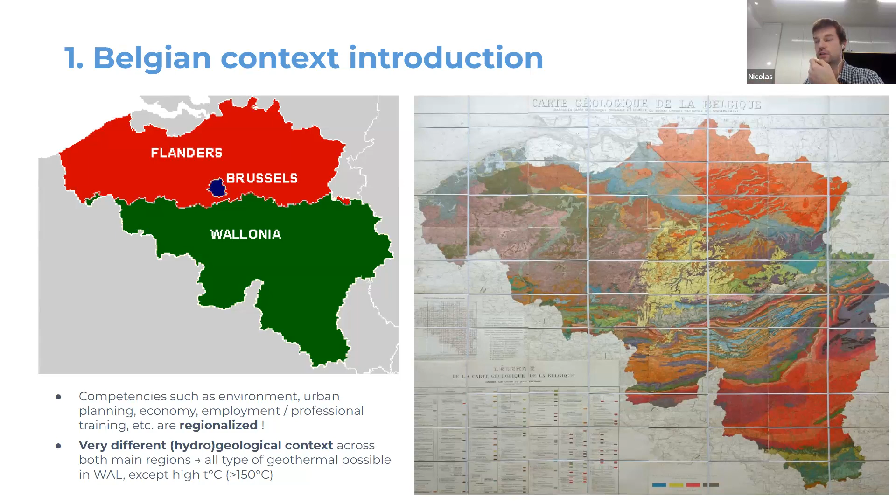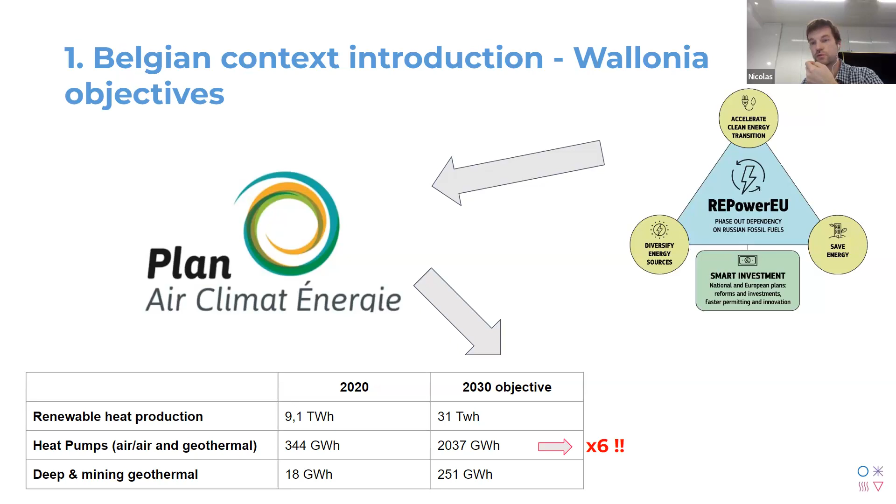If we continue on the Belgian context and especially on the Wallonia objectives, the RePowerEU plan from Europe has been translated into a plan in Wallonia, which is the Plan Air Climat Énergie, with very ambitious objectives for 2030. For example, times 6 in terms of development of heat pumps in the region.

And then there are two other locations in Flanders. Another one which is public, the Mol Balmatt well, which is productive at 3.6 kilometers, and another one that has been opened very recently by Janssen, part of the Johnson & Johnson group pharmaceutical company, which recently opened a 2.4 kilometer deep well in order to heat their big campus in Beerse.

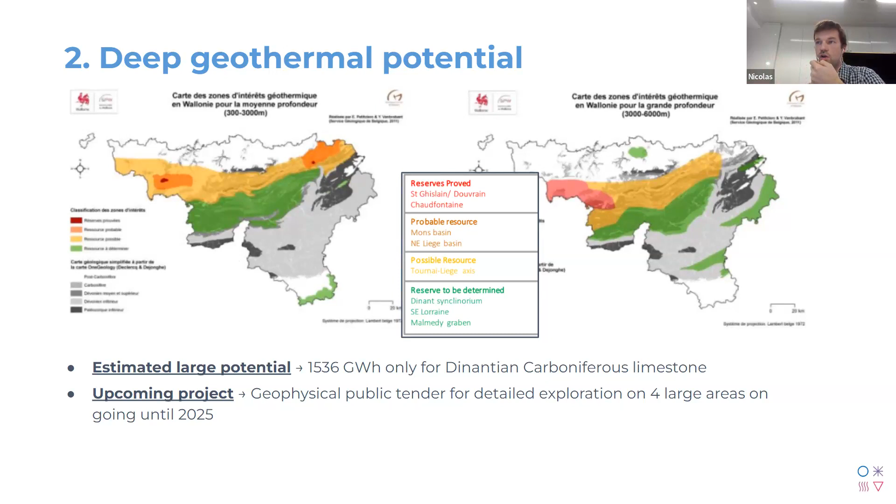If we go to the second part, which is the shallow geothermal status in the region, this map summarizes the active and the inactive shallow geothermal systems in the region. You can see that in terms of closed-loop systems, we have about 2,000 systems installed, mainly private residential installations, and that we are currently going around 150 to 200 installations per year. Again, mainly private residential installations.

In terms of open loop systems, we have only one existing project with aquifer re-injection. And there are at the moment approximately 20 projects that are under study in the region. If we look at the open loop systems with surface reinjection, we have about 40 existing projects at the moment. And then we also have 2 projects under study for mining geothermal.

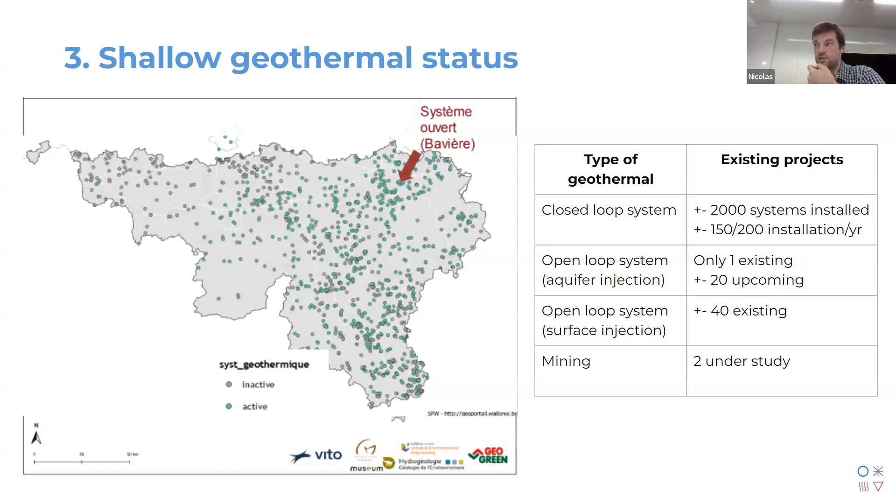If we look at the available maps for potential for shallow geothermal, we can see basically that the entire region has a pretty good potential in terms of shallow geothermal, both in terms of closed loop and open loop. I have also provided some maps that Resolia and Bruxelles Environnement, so the Environment Regional Association for Brussels region, have worked on.

You can see on the left-hand side a map of the potential for closed loop geothermal across the region. And also, I must say that they have a very good system that can be used by everyone. It's a freeware, accessible on the website. On the right-hand side of the slide, you can basically type a location on a GIS map on their website, and the website provides you with the potential in terms of shallow geothermal for closed loop or open loop systems, with a very simplified but very accurate view through geological logs and layers of what you can find in the subsoil.

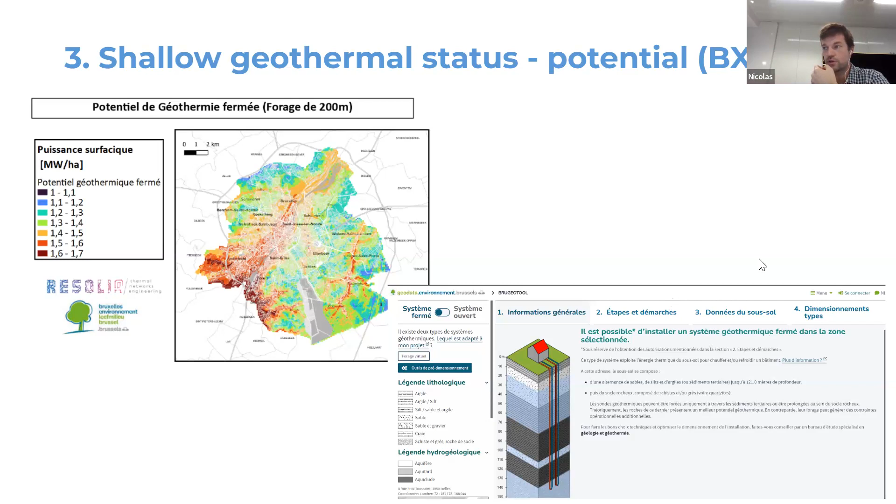What about the upcoming projects for shallow geothermal? Well, this map summarizes that for Wallonia. Recently, last year in 2022, about 34 projects have been awarded by the Walloon region to really support the development of shallow geothermal projects in the region. There are 24 private projects and 10 public projects that have been selected.

There is also support from FEDER, so from Europe. There is also the Interreg project, which helps to better understand shallow geothermal potential. There are some incentives in terms of feasibility studies. And I must say that since a couple of months, or maybe 1 year, we can see a very nice boom in the private sector, which starts to invest massively in shallow geothermal for real estate, industrial, or commercial development.

And we can also see a boom in terms of closed loop system installation for private residential. Still quite expensive, but we can see a boom in terms of installation.

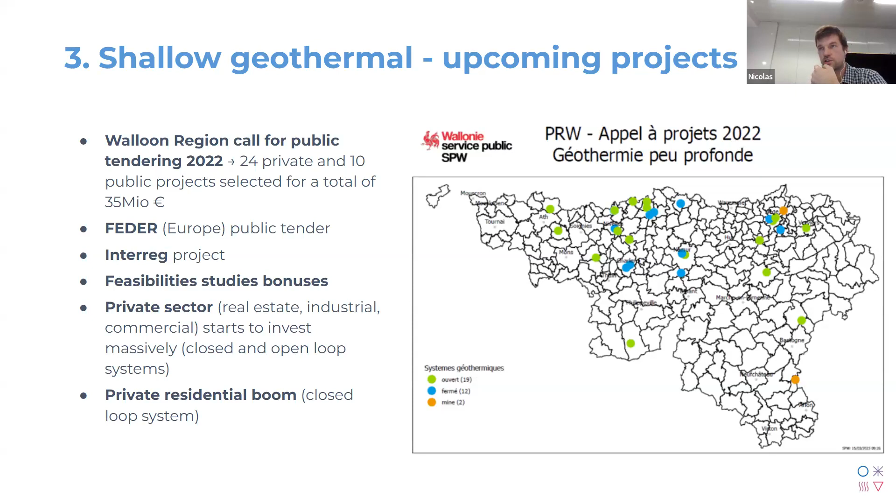The third part of the presentation is about district heating status. This is a map we quite like at Resolia because it's summarized based on the Euroheat and Power 2017 data. So it's slightly old, but it gives a good feeling of what's happening in Europe in terms of district heating development. And we can see actually that Belgium is absent of the European map, because it's less than 0.05% of the heat needs in the country that are covered by district heating.

While you can see, of course, the Eastern Europe and the Northern Europe countries who have a very good ratio of district heating installation. And especially for the Northern Europe, of course, Iceland, a nice percentage of renewables that are being used for those district heating.

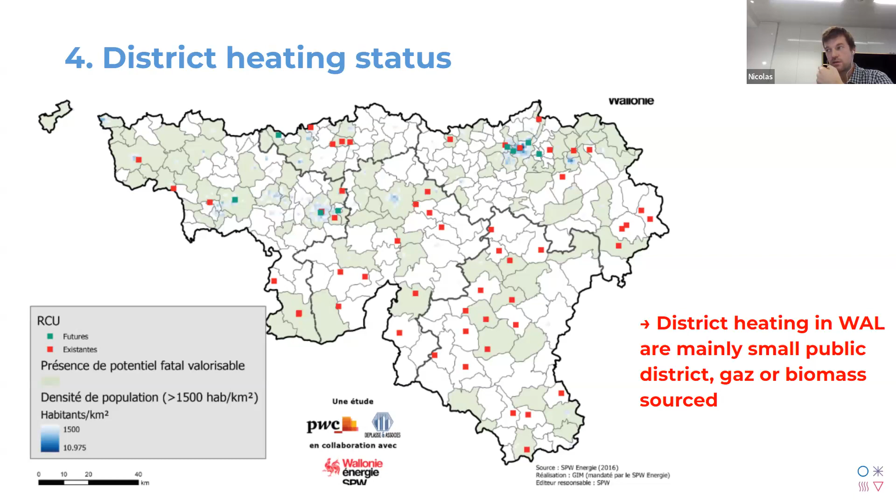And in terms of upcoming projects, there is at the moment a new call for public tendering that is supposed to provide 30 million euro of public funded money for decarbonized district heating installation in the region before 2026. There are also FEDER, so Europe public tender, and I must say that we also see some requests from the private sector to start to invest massively into the district heating, mainly for real estate and commercial development.

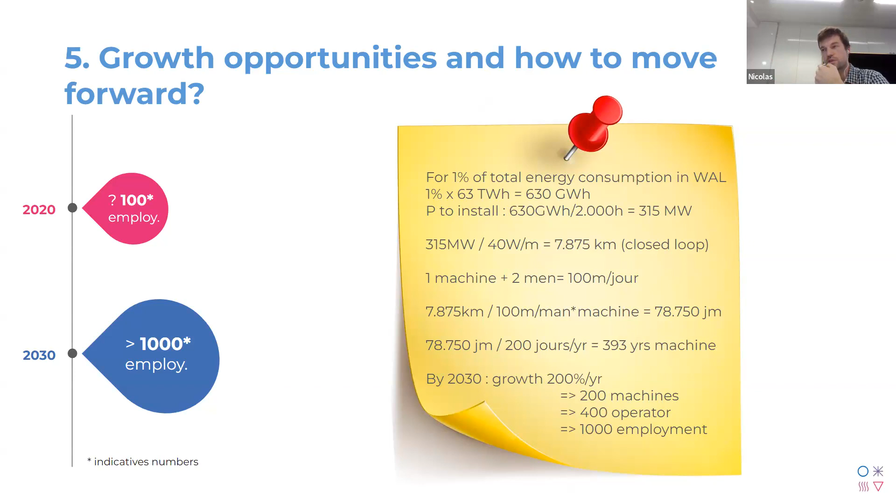The last part of the presentation is about the growth opportunities and how to move forward into the geothermal and district heating sectors. This is a post-it note that we have done at Resolia, a very quick calculation we have made. If we consider 200% growth per year, which is quite big already, we would arrive at 2030 with about 200 machines and 400 operators for about 1,000 employment. And that's only to answer about 1% of the total energy consumption in Wallonia. So that gives a good feeling of the investment that are needed for the geothermal development into the region.

In terms of money, we need to continue the financial support the Walloon region is offering since 2 or 3 years, and call for public tendering, incentives, etc., are very good, and we need to continue that. We need to work on the risk management, for example, through a public funded guarantee mechanism to help investment. Indirect financial support is also good in terms of support on the VAT for heat. And of course, investment, public investment in massive projects. And deep geothermal requires massive investment from the public to help structuring the deep geothermal sector.

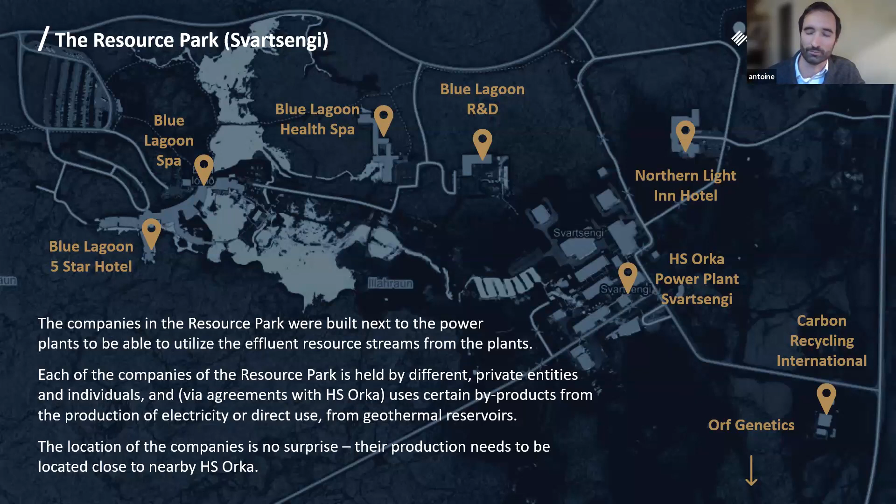So here we see the famous Blue Lagoon that uses hot water from the plant. We have Carbon Recycling International that uses the few emissions of CO2 in order to produce methanol. On the next slide, we will see more agriculture and fish farming industries using the heat to dry fish, to grow vegetables, just to name a few. So that's an example of cascaded use.

But we will see on the next slide that the legal framework needs also to facilitate those projects, because in countries that will mainly use the resource for direct use, so heat production, cascaded use could also be a solution to enhance the value of the resource, to find several offtake options in order to make, for example, a project more bankable. So the legislation needs to allow for multiple licenses on one resource.

The framework needs to clearly define the activities under the licenses, because, for example, in some countries we've seen that the only use of geothermal resources that is allowed is power generation, which is an obstacle to, for example, direct use for district heating or cooling. So it's important that the legal framework provides for multiple uses of the resource.

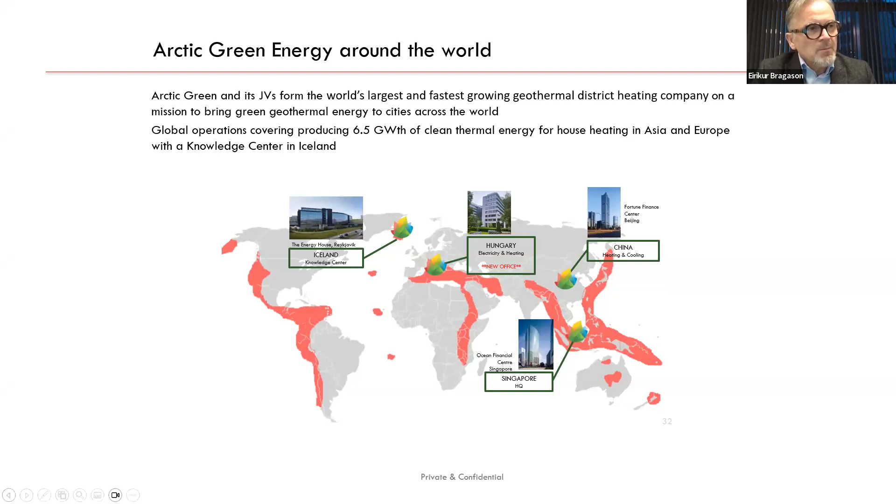And we are also pretty experienced in business development, building up side businesses and making the business plan really work. Sometimes heating is not enough, and sometimes you need to have some additional revenues for making the project profitable. And this is also something that we bring to the table.

So in terms of Belgium, it's very interesting to hear what you are doing in Belgium, and obviously you are using shallow geothermal quite frequently. If I heard correctly, 2,000 heat pumps, and that's pretty good.

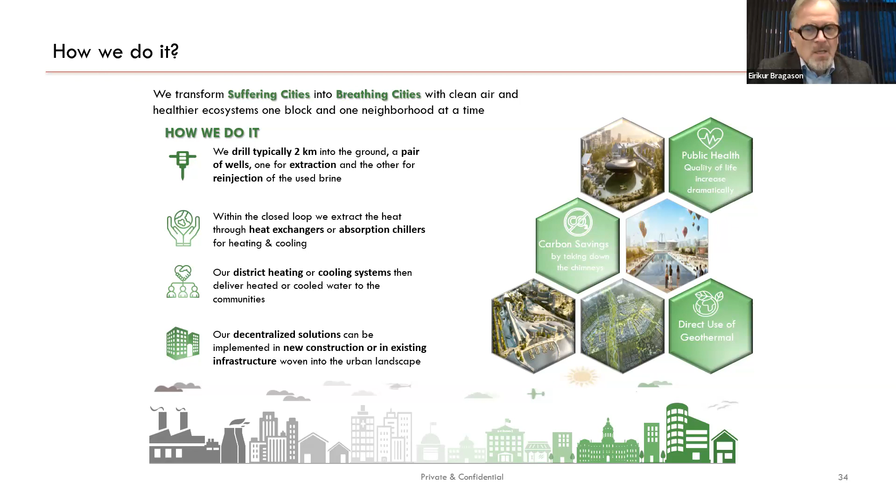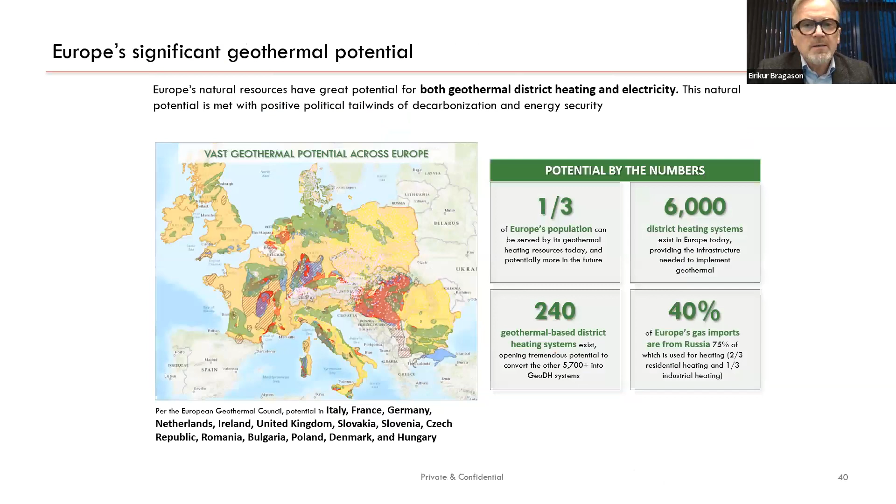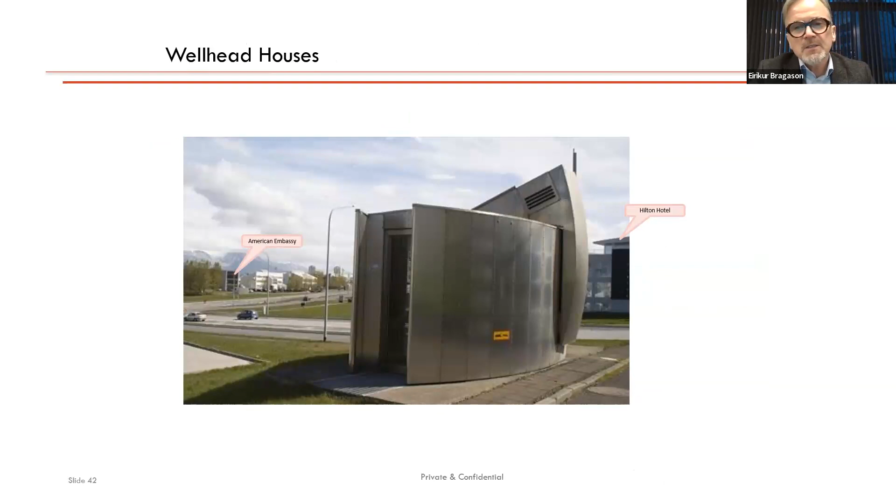So, one more time, the slides will be available after the presentation, especially those technical slides on Budapest. They need a little bit of time to look at them. This is a wellhead house in the city of Reykjavik. So we emphasize integrating this into the landscape.

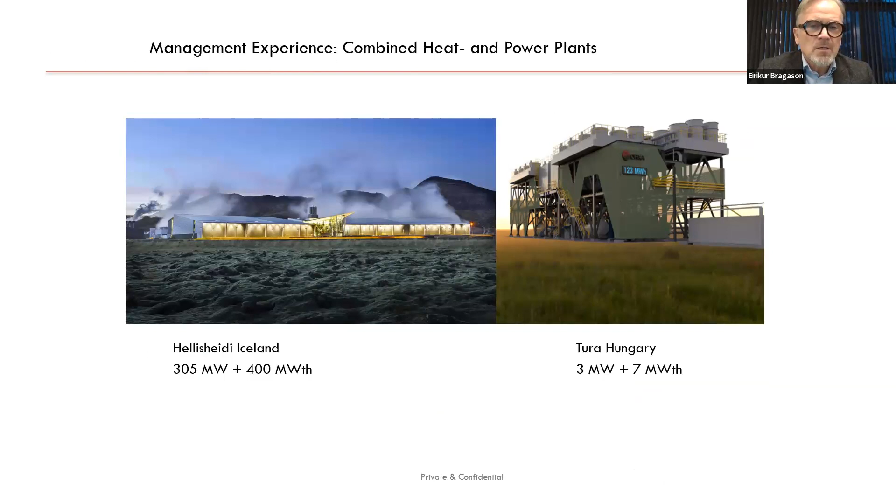Our management has great experience in building up power plants and side businesses, Blue Lagoon obviously being the most famous one, in the meantime producing more revenues and more valuable than the power plant itself. You might have heard the story that this was originally waste water from the power plant, but is now a very blooming business.

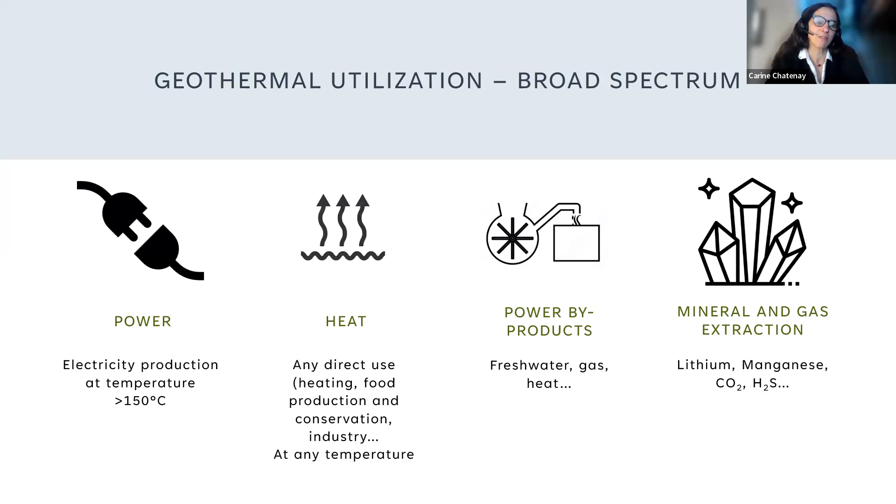I wanted to mention that we at Verkis have been involved in a few projects in Belgium. A few years ago, we provided consultancy to Vito in the Balmatt project. I'm glad to see that it's up and running today. And also to the BRC, I'm not sure I'm pronouncing it right, in Janssen and Janssen Pharmaceutical. And I'm glad to see also that it's running today. It's really good to see. I understand that in Belgium and in Wallonia, you might have more cases here with heat or eventually byproducts. Power could be a case in some cases, but my presentation will be a bit on both.

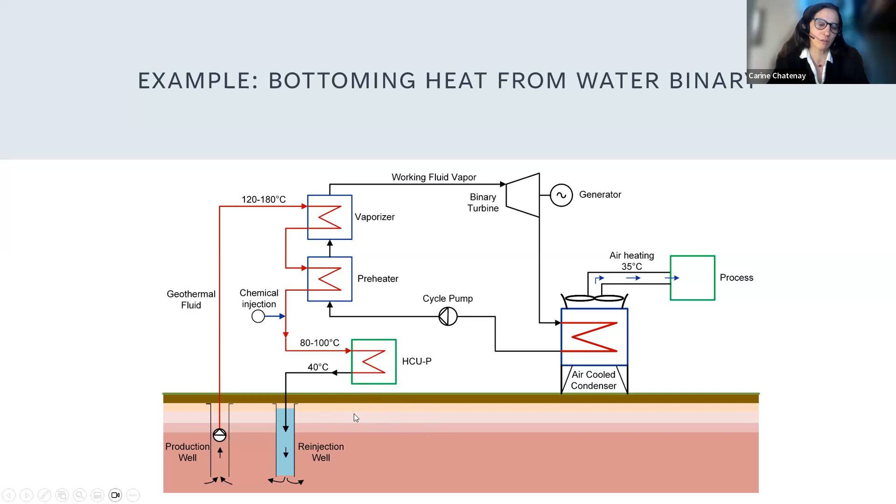Talking about both, here you have an example on how you harness heat from a binary power plant, as part of a cascaded scheme that Antoine was mentioning before. So basically, you would try to recover some heat on the cold end of a process. But in Belgium, I believe that these examples are probably more relevant. So basically, you have a well at certain depth, and then you run it through a heat central unit, and then you have your application. Here in this case, space heating, could be something else, and then you re-inject, which is always the best case.

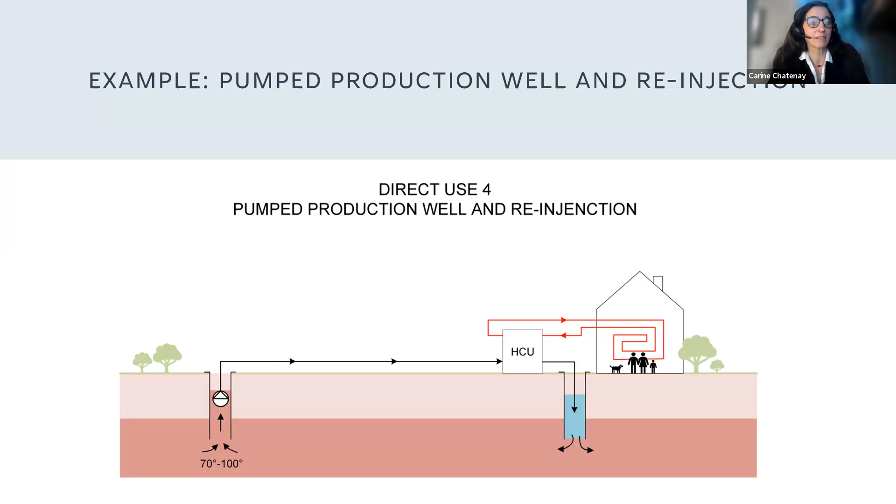I know that in Belgium you have cases where you have NORM, which is naturally occurring radioactive materials, and this calls for a closed loop on the geothermal resource. So you're not allowed to just have it open and do things like we do in some other places. This is of course something that has to be taken into account on a case-by-case basis. Well, deep geothermal can happen in many different ways, and you have different temperatures. Just a reminder here, you have so many cases that operation and management is very different from one place to the other.

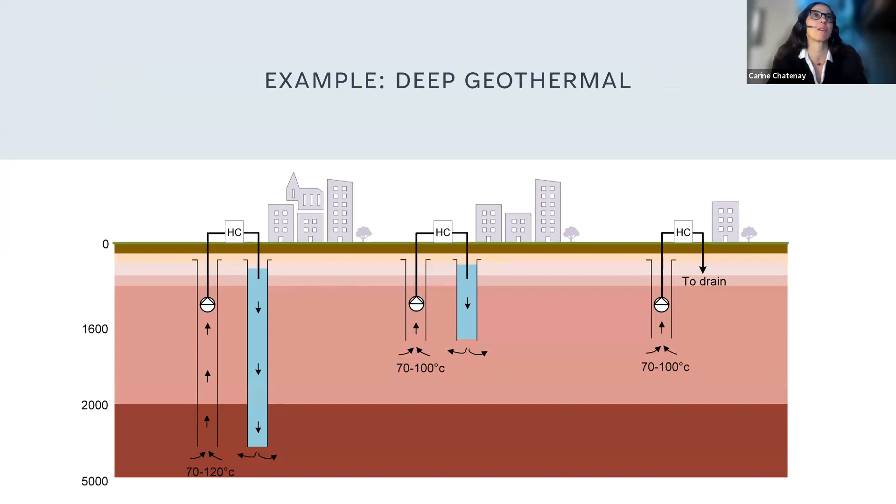In the case of direct use, so by direct use, we are talking about when we use the heat directly, like for space heating or other applications like fish farming, horticulture, swimming pools and balneology. These are all the components that you have. So on the production side, you would have production well, reinjection well, resource gathering system, and reinjection, of course, and a lot of equipment. And you would transfer it to heat central, where you would also have a lot of equipment. And just think about it in terms of operation and management. It's quite a lot of things here that are dealing with the geothermal system, and you might experience various issues depending on the composition and nature of your resource.

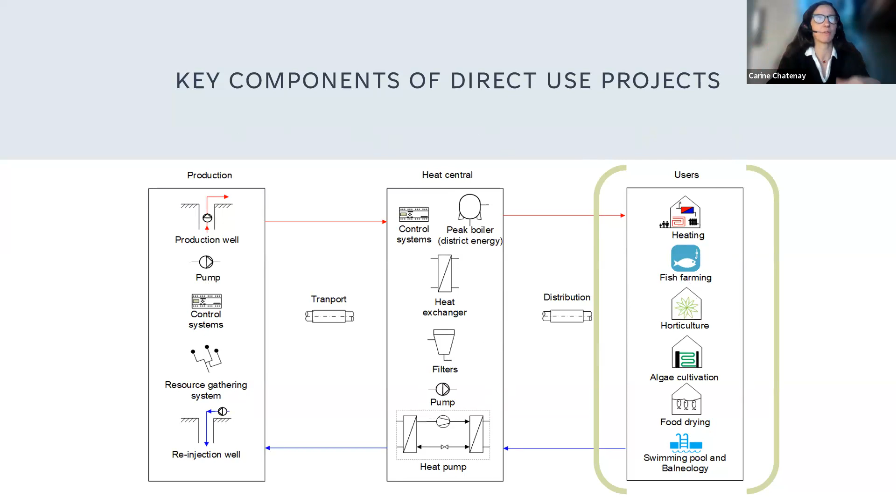And then maybe more common, but I understand that in Belgium you don't have so many district heating systems, is the distribution to users and the operation and management, and maintenance of a district heating system, which is more classical, especially if you have two separate systems with a heat exchanger in between.

Just a few examples we have here in Iceland, geothermal power plant up north, a very recent one, temperature very high, obviously, maybe not very relevant for you. Food processing, that's very interesting, and it's going to be the next best thing, I think, for geothermal around the world. Requires temperature typically around 80 to 150 degrees. Greenhouses, it's always very important for food security.

Geothermal heating, here in the case of Reykjavik, where we use the waste heat from the geothermal district heating system to heat up the street and remove snow and ice, which is really good for society, fewer people who break their leg or are harmed in bad weather conditions. And of course, the example of Sinopec and Arctic Green in China.

We started to help just to provide consultancy some 20 years ago, and it's just amazing to see the growth of these projects, and it's still growing. They have lower temperature, I believe, more like what you have or observe in Belgium.

Okay, but I promised a few words about the development of projects. Usually it takes many years to start operation. You have many steps to undertake. You have to know your resource, you have to plan and prepare, and when you implement, drilling is definitely a challenge. Even in your condition, you have to drill very deep and be sure where you're drilling, as sure as possible, based on the resource reconnaissance, and it's very complicated.

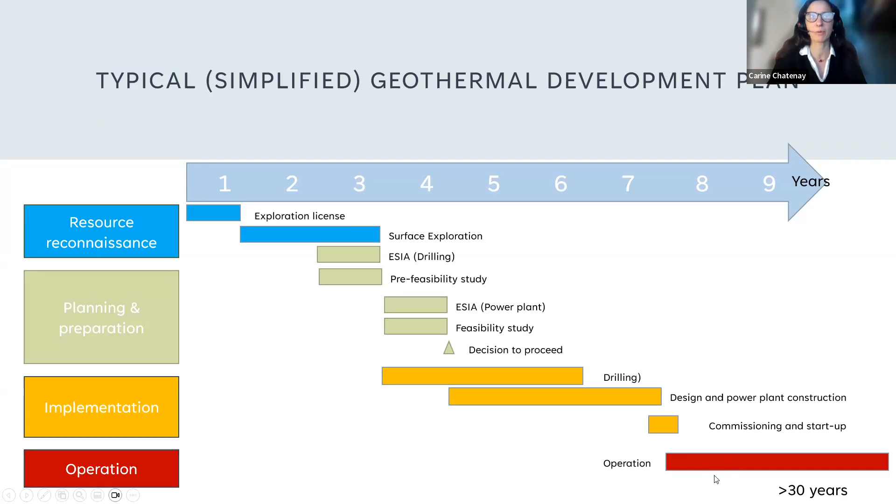It gives you time to plan for proper application of geothermal utilization. But after that, you have more than 30 years of operation, so you have to plan well. And just a reminder that it's very important. I'm going to give you a few examples of operation and management issues. This one here is in the Reykjanes Peninsula in Iceland. I think they had a pipe that burst and damaged some equipment around that, so things can happen.

But in the first years of operation in geothermal, and this is probably more valid for some projects than for others, you will have well decline, you might have enthalpy change, gas content change in some cases. Chemistry can be a challenging thing. I know that you have very salty water in Belgium, for instance. It's very challenging to use that.

And then, of course, your operation, management and maintenance team might not have all the skills or just know the system. I know that when we talk to operators here in Iceland, they have a very intimate knowledge of what happens when we do HAZOP studies on their system. That's just amazing, because they really know how the system reacts to special events. So these are things that are quite challenging for companies who start operation, but then they just get up to speed.

I wanted to mention here one case that's very typical for geothermal. It's when you have a steam pipe that starts to leak. You will have corrosion that starts inside the pipe; the bottom of a pipe is the typical place. You have a little bit of water sometimes, and then you could have cracks. It depends on how it's been fabricated and assembled, and you might have a pipe stress episode and it will leak. It's a little bit challenging to deal with that.

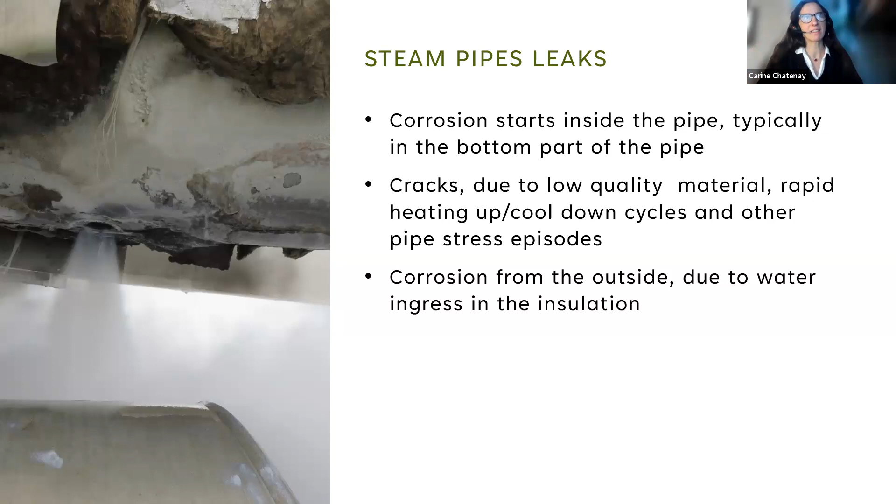Another typical problem you have in geothermal projects is scaling. It can be due to a high content of silica, calcium, and other components. Typically it depends on the design. It has to be properly designed, but it starts at the flashing point. What happens is that the diameter of the pipes is reduced quite a lot, as you can see on this picture and other pictures I have afterwards.

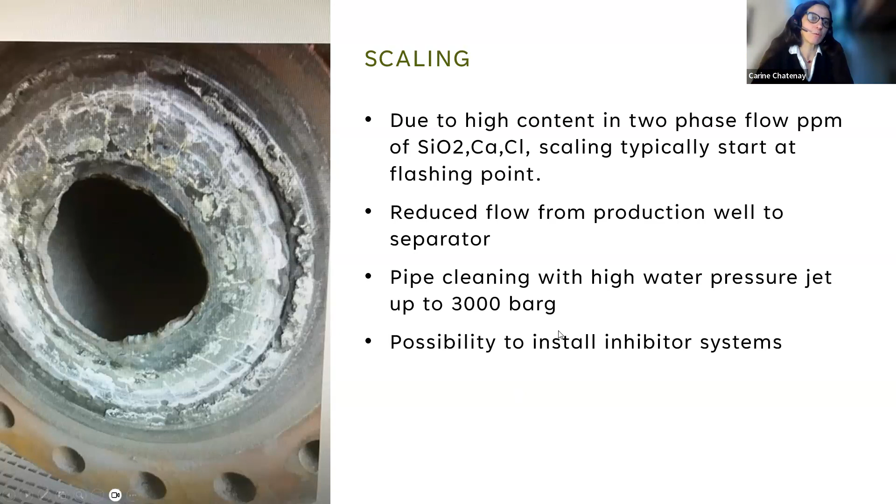And well, it's going to reduce the flow to a power plant or to a heat central, and there will be less power or heat that you recover. But there are ways to deal with that: pipe cleaning, inhibitor systems and other systems. But it's challenging. Here is just an example. You can see the inside of the pipe. That's probably half of what it should be. Not really nice. Just a few examples, and then I will probably run out of time.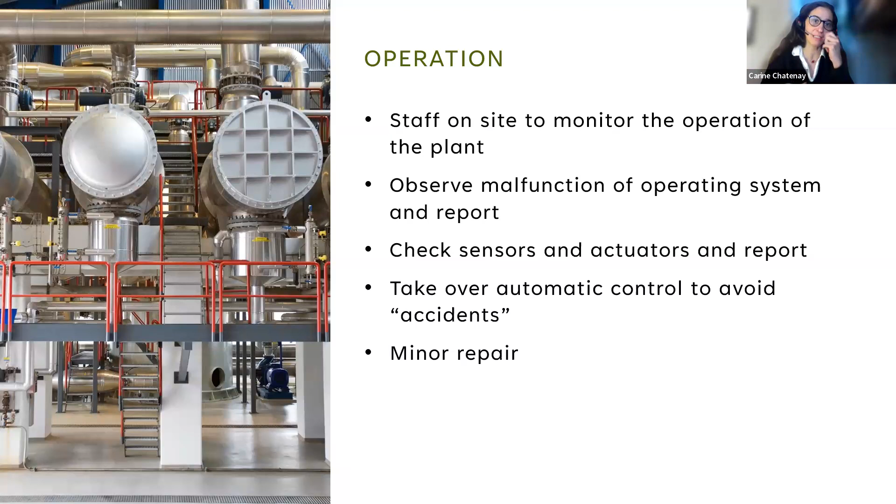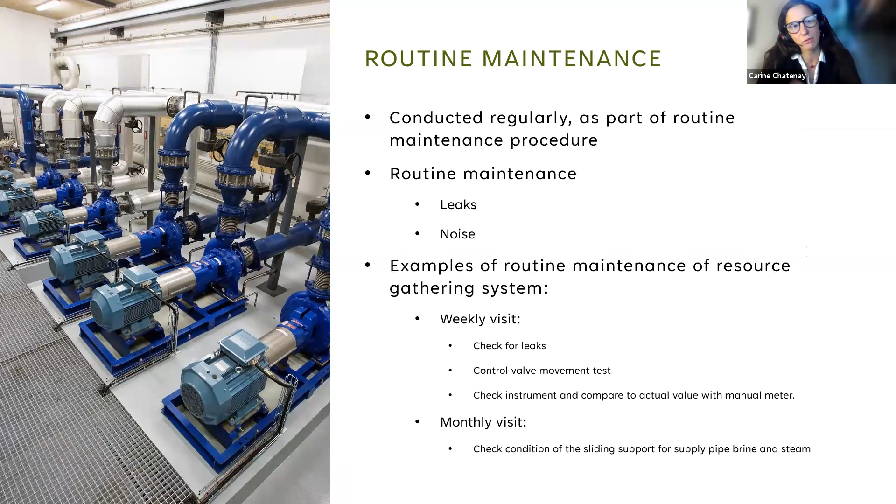About operation and maintenance activities, some things are typical for any power plant, heat central or district heating. You need people in place, and they do basic maintenance activity. You will have access to the slides anyway afterwards, so I won't extend on that one. You will have routine maintenance, and that's also very typical. You just have to make your plan for your plant.

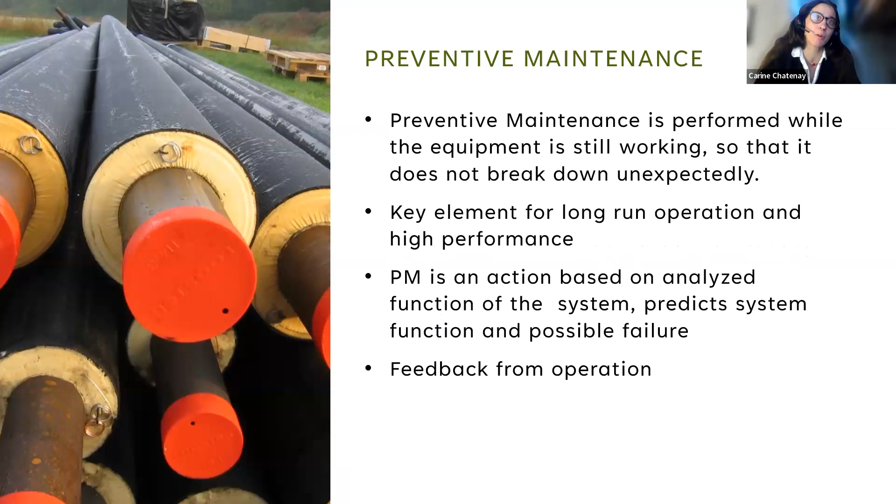You would also do preventive maintenance. That's typical for any power or district heating project, to make sure that you prevent any breakdown ahead of time. And maybe what is more special for a geothermal project is the planned maintenance stop. We do that in geothermal power plants, and I expect that we also do that in district heating, although to a different extent. We have minor stops of 1 week annually, and every 3 to 4 years, depending on the system, we do a major stop.

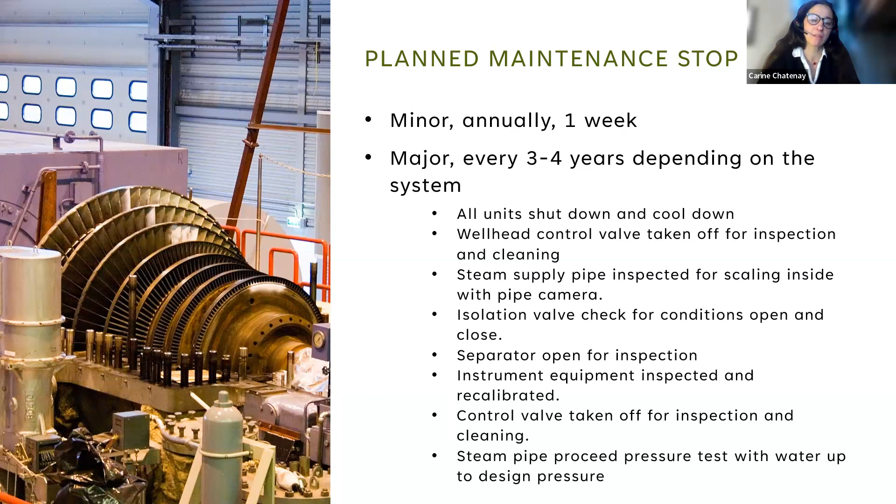Here you have a turbine that has been taken out for overhaul, for cleaning and maintenance. And you would take a look at the many pieces of equipment that could be under stress during operation.

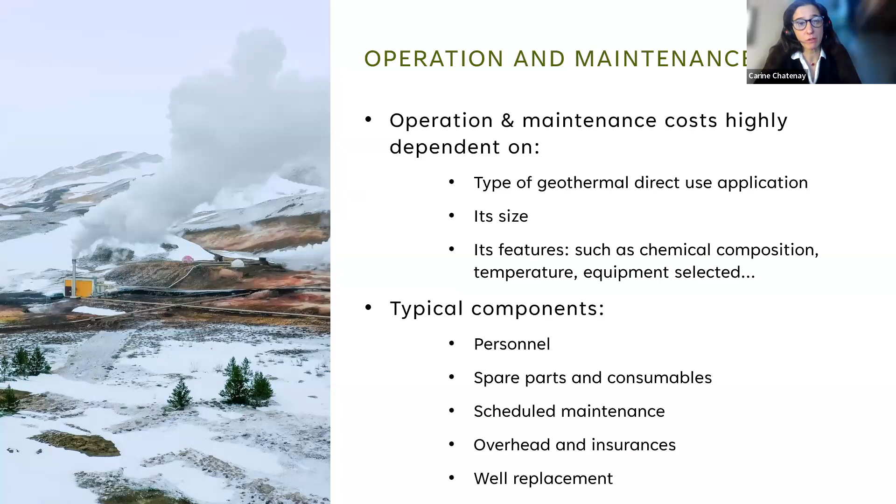A few words, but then I'm done. It's the operation and the maintenance management. What we've seen in the projects where we are supporting developers is that some people just go, we are going to do it ourselves. And then they need to have experienced operation people, and then they need to train operators just so that they are up to speed on what's so special about geothermal.

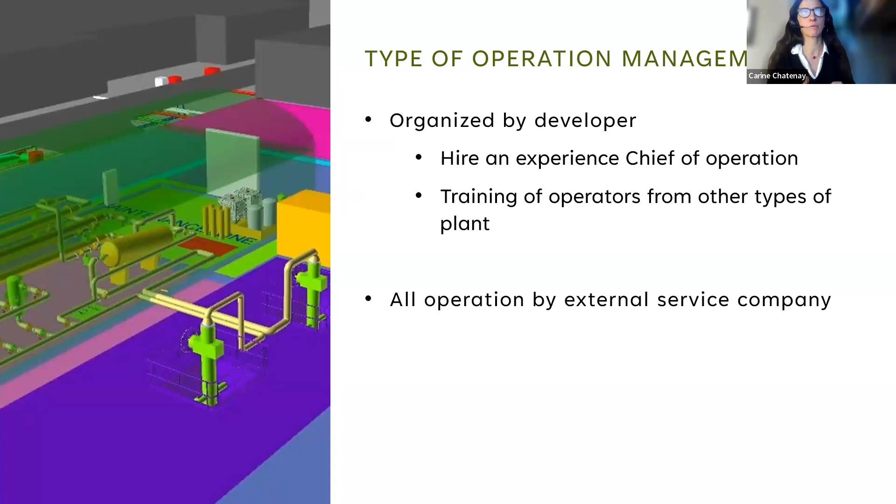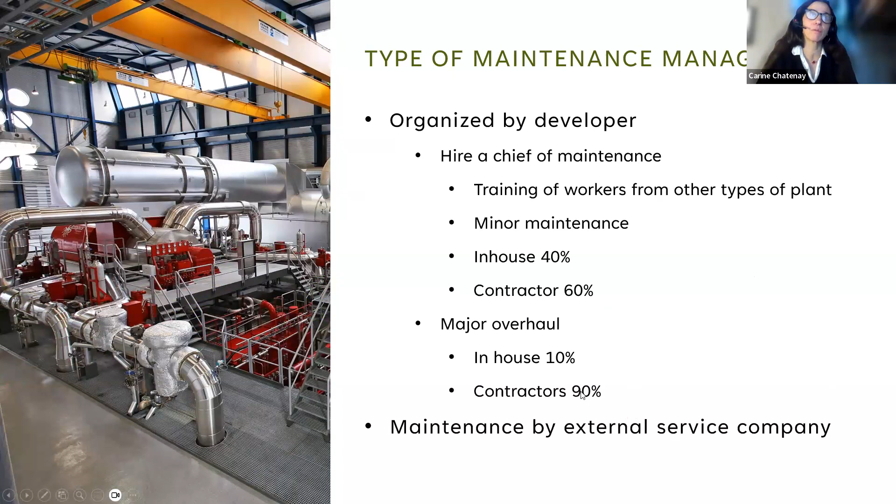But they can also rent the services of other people, and that's the same for maintenance. Basically, you would have contractors for major maintenance stuff, but you could also do everything with a knowledgeable external company. I'm going to stop here.

Just to remind you, though, one last thing: I know that in Iceland we're blessed with geothermal resources. It's a bit too much sometimes, like when you have a volcano eruption just a few kilometers from a geothermal power plant. I'm very glad that many things were put into place when we started to have the earthquakes a month ago. So it looks like we're able to protect, to the extent possible, all the utilities.